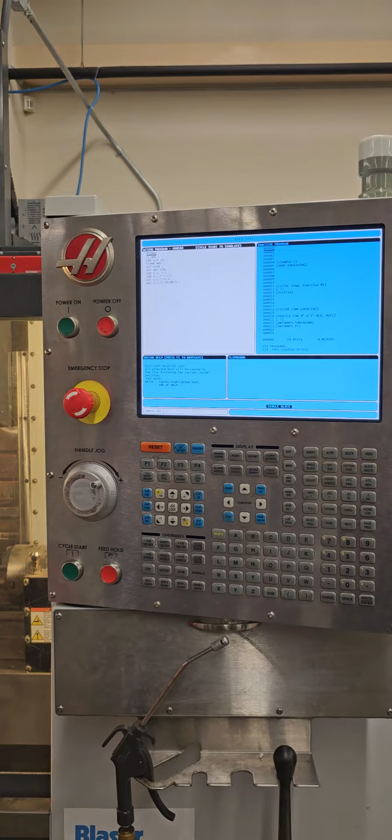Just as over there, whenever we have our test, you determine where you put your WCS, right? It's going to be in the center, bottom left, top right, whatever corner. You determine where you're going to put that at. You have that freedom, right?

So you have to touch off your X0, Y0, then your Z0 on whichever tools you're using, right? So if I'm doing facing and profiling, that's two tools I have to touch off, correct? You guys know how to do that? Because we went over it. That was the first test pretty much, right?

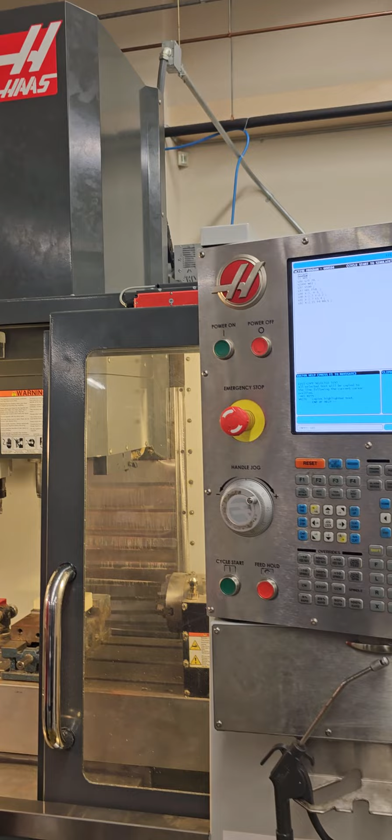So since your class starts right now, in 10 minutes, I'm not gonna go over that. I'm gonna go over what the program is, right?

So on this machine, it is a little bit different to call up your program. So I'm gonna go to list programs, come down, I'm gonna just call up 505, right? I need to push 00505. Somebody had a G01 before, so it's not gonna accept it.

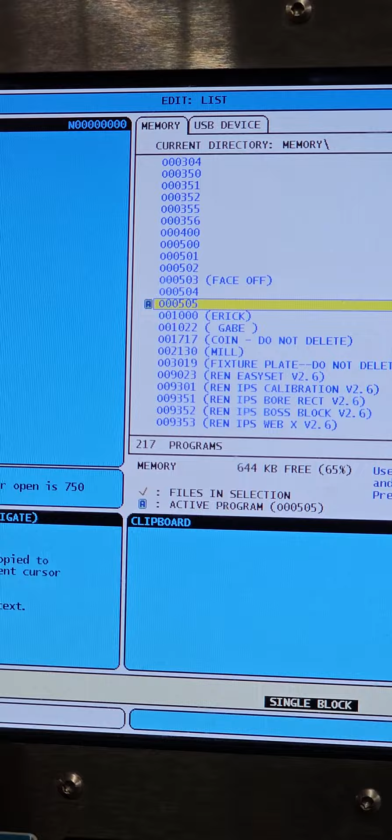Alright, so memory O00505, enter. See how I created my new program in there, right? So on this one, it automatically selects it and puts it under memory. Good. So all I have to do is hit edit, and there I am, right?

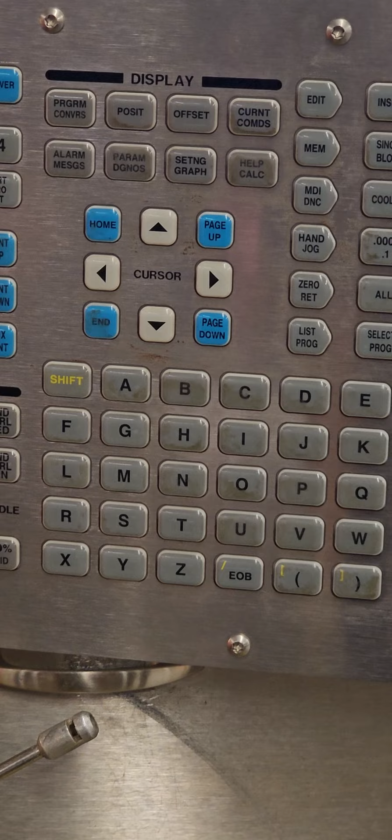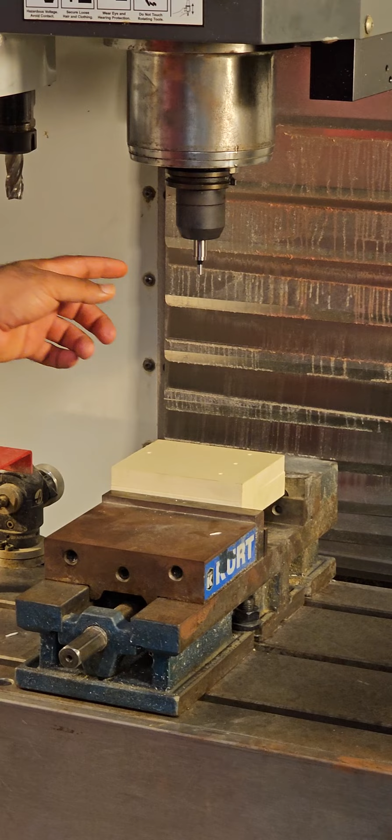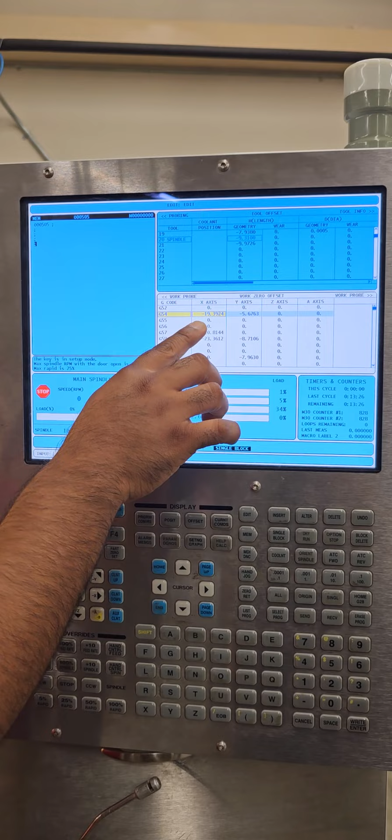Yeah, so in this case, it's 100 thousandths. So over here under offset G54, if I had my edge finder there, I would push part zero set.

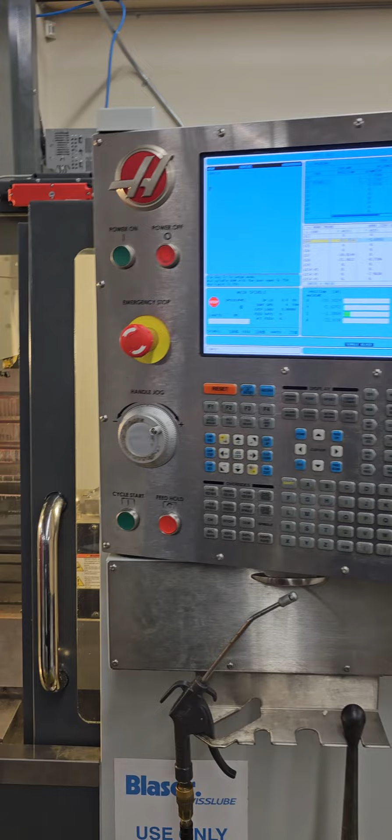After that, I would just hit 0.1 enter, and it will automatically add that 100 thousandths. And that's right, because that edge finder's a 0.2, so we're using half of it. Okay, yeah, somebody broke the half-inch one. Damn, that sucks.

So remember, guys, if you do it down here, that Y is going positive, so it's still positive 0.1, right? But if I do it in this corner, my X would be negative 0.1, and my Y would still be positive, right? So it has to be correct and it has to make sense.

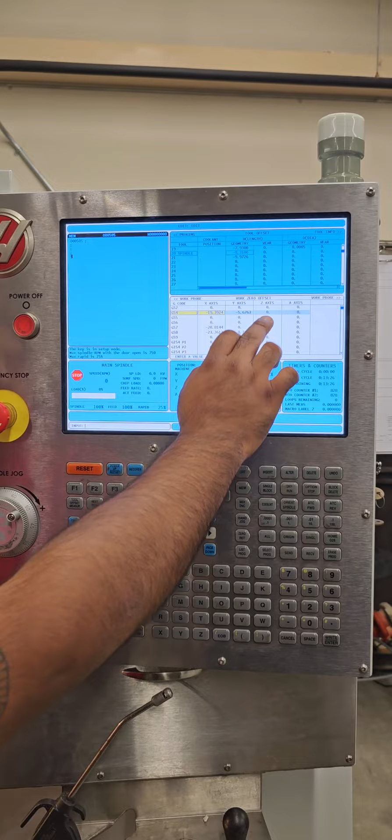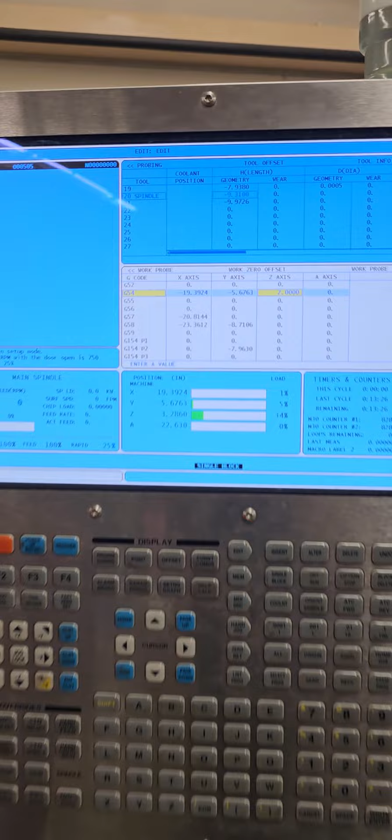All right, so another quick thing is you want to make sure you have Z0 under your G54. When I tell you guys to run it 2 inches above, after you touch off your tools on your Z, that's when you're gonna add the 2 inches here, enter, yes. Now everything is gonna follow suit 2 inches above the part.

Does that make sense? But if you have a 2 on there, and I touch off, like let's say tool number 1 or tool number 2, it's gonna offset those 2 inches from these numbers. And that's incorrect. Why? Because when I load up for my next job, I'm not gonna know that I had that 2 there, and I'm gonna jack something up. Does that make sense? Correct.

So we wanna have it at 0 first. Then once you run it 2 inches above the air, then you just take that back to 0 and you run. Does that make sense?

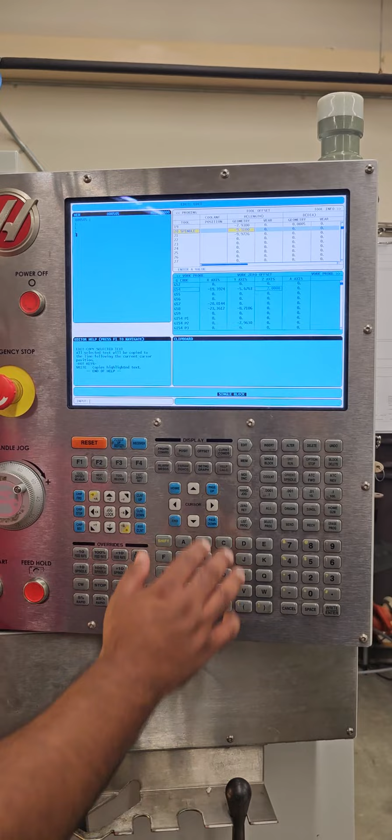All right, back to the program over here now. So what's the first thing that I need? I need to make sure my Z is clear, right? So G00, G53, Z0, end of block. That's it, right?

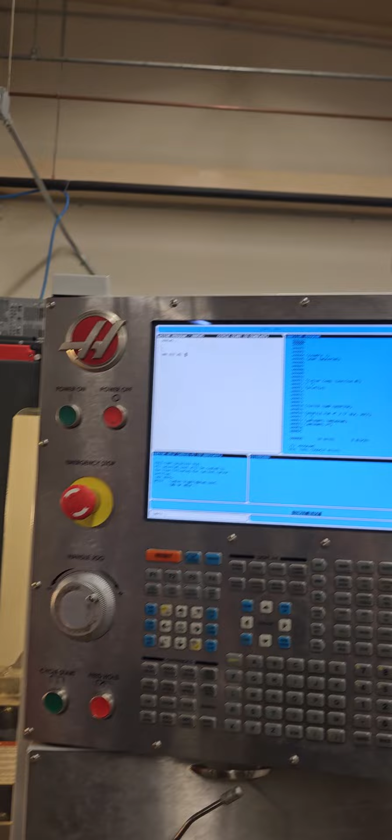For the beginning. After that, I need a what? Tool number, right? So let's just call for the facing. Let's do facing first. So T1 M06.

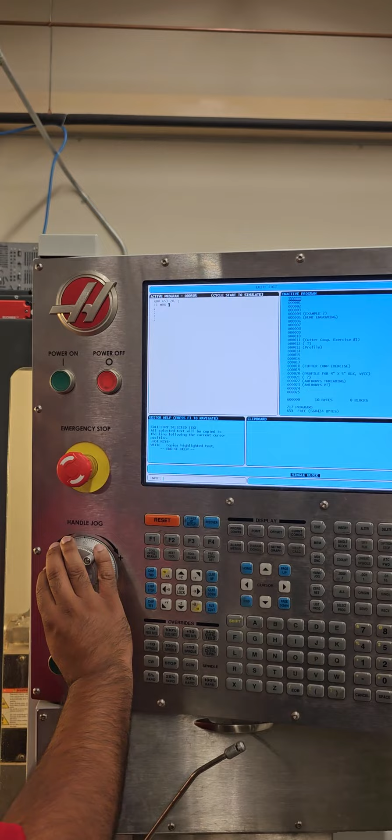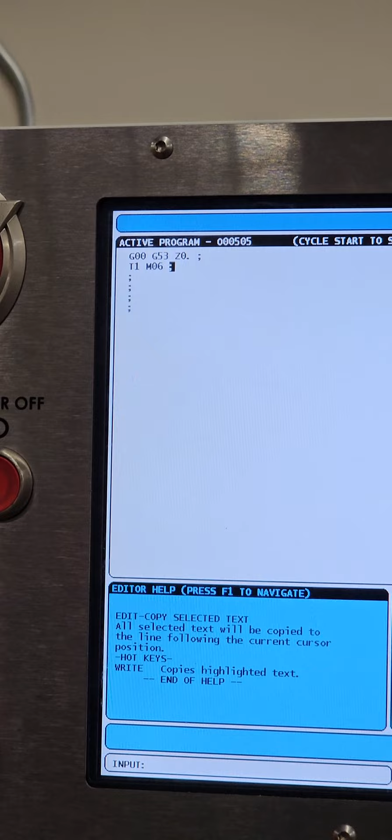Notice the differences, right? Between the lathe and the mill. The lathe, I would have had a T101, correct? If you put T101 on the mill, it's gonna ask for tool 101. Do they exist? Yeah, there's some of these mills that have closets in the back, right? But this one only has 20, so it's gonna give an alarm, correct?

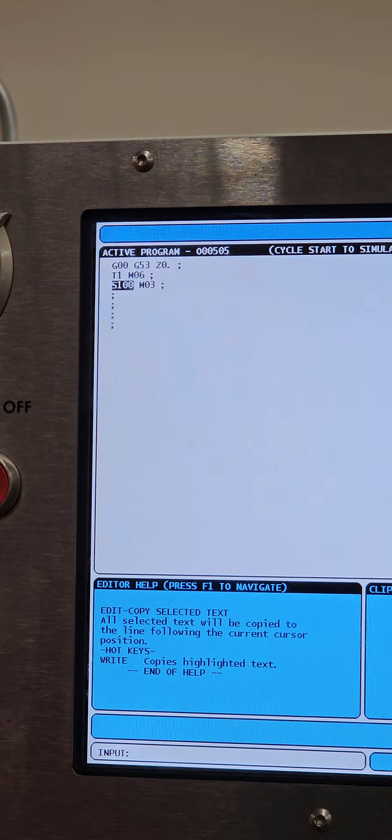As soon as I bring up my tool, I like turning on my spindle, that way I won't forget, right? So S1000, M03, end of block. Oh, I put S100. That's fine, I'm gonna go slow. All right, so what's next?

Work piece offset - I need to tell it where it's absolute or incremental, right? And I need to tell it where my G54 is at. While my Z is still up there, because I'm not in danger of anything, right? So I need a G90.

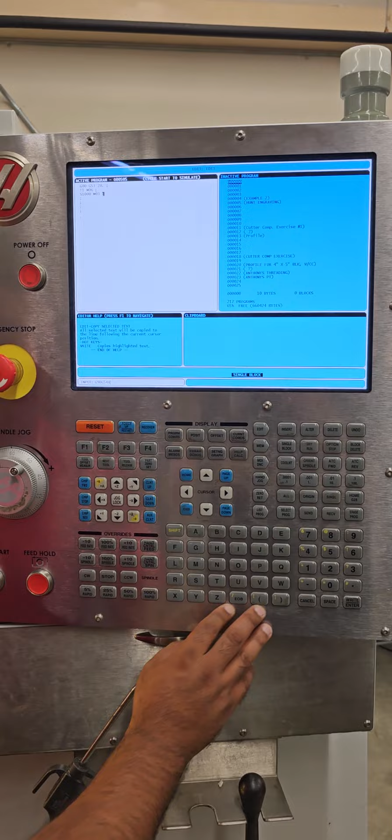G54, X, since I'm facing with my face mill. I know that this is 3 inches, so the radius of that is what? 1.5, correct? If this is my X0, I'm gonna start at least at X negative 1.6. Give it a good 100 thousandths on the left of it. So X negative 1.6. Does that make sense?

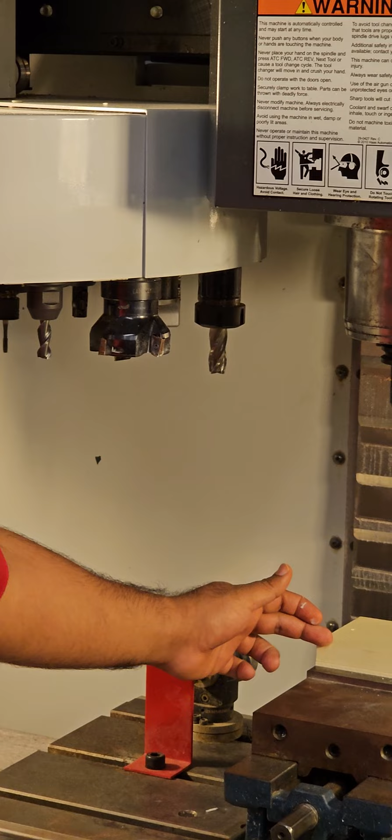On my Y, I know that this is 3 inches, and I set my center here. So I have 1.5 hanging down from here, correct? So if I call it Y positive 1.4, I still got 100 thousandths that the tool's gonna hang out and still clean up that material, right? So my Y could be 1.4.

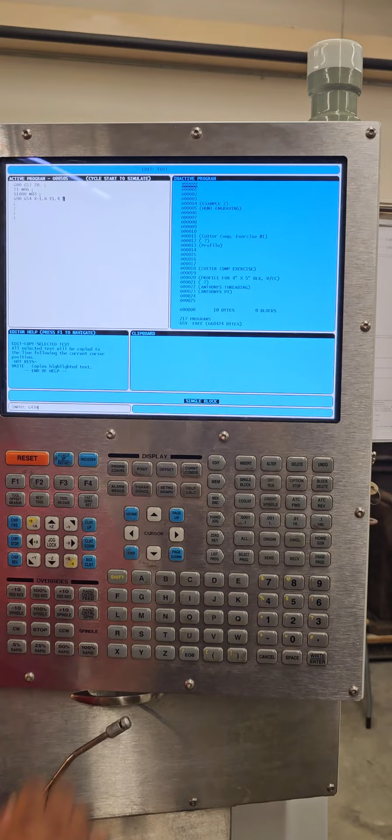Are we tracking so far? Yes. Alright, so now what I need to tell it is my tool length, correct? What G code is that? Some of y'all should know this. G43, right? G43 always plays with my tool length. Well, my H, right? And that H needs to match up with my tool number, correct? Then I'm gonna give it a G00.

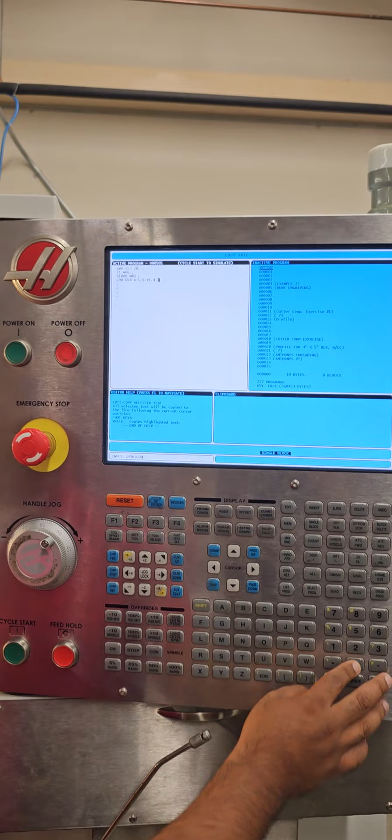Oh, I forgot a G00 up there too. G00 Z1 inch. So your H and your T right there on that line is matching. Yeah, so now it identifies the length of the tool, and we're gonna come 1 inch above the part, right? Really 3 inches because of the 2 inches that I'm gonna give it.

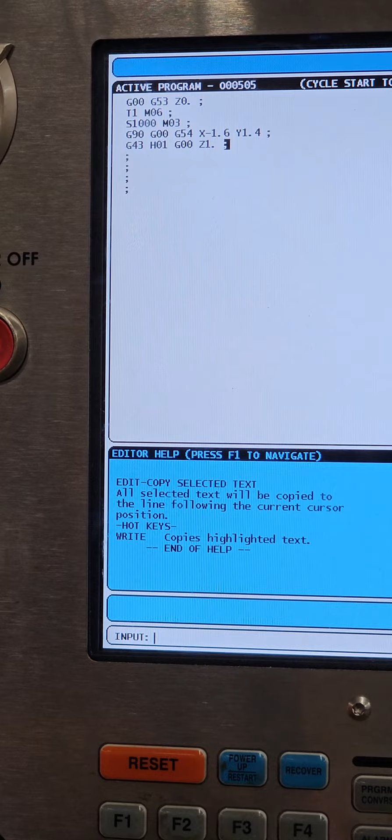All right, now is that tool height like the entire thing, or just from what's protruded out? From here to right here. That's 1 inch. No, that 1 inch that we put - right, we touched off from the face of the part, right? Yeah, that's it. I'm talking about the H, the H01 on top of it.

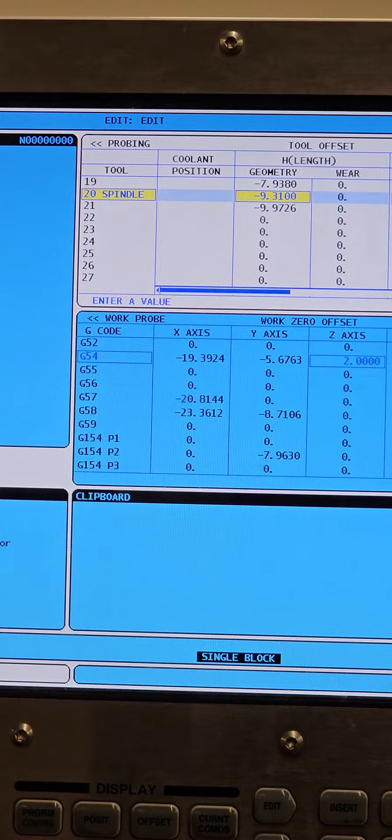Okay, so the H01 is just referring to the tool that's in there. The H1 is gonna be reading that. Whatever I set my tools at, that's what it's gonna be reading. Gotcha. From the machine coordinates, right?

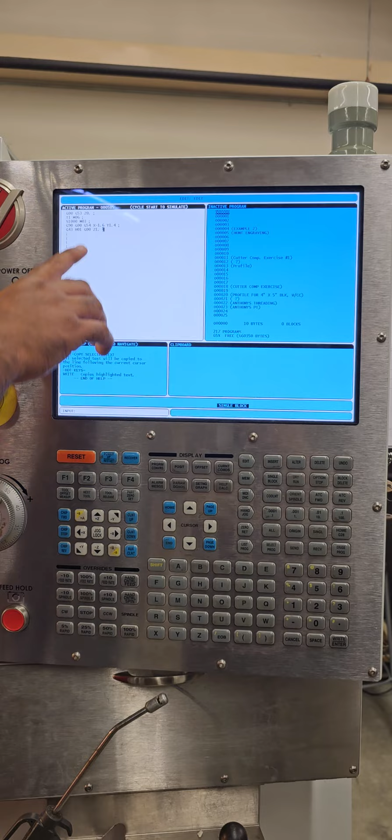All right, so now what do I need? G54 - I got a G54 already. Oh, I see, so now we're over here, right? 100 thousandths above - I mean, 1 inch above, right? So now I'm gonna take it down to the face of the part, right? So I can still be on a G00, Z0, correct? End of block, enter. So now I'm here on the face of the part, right?

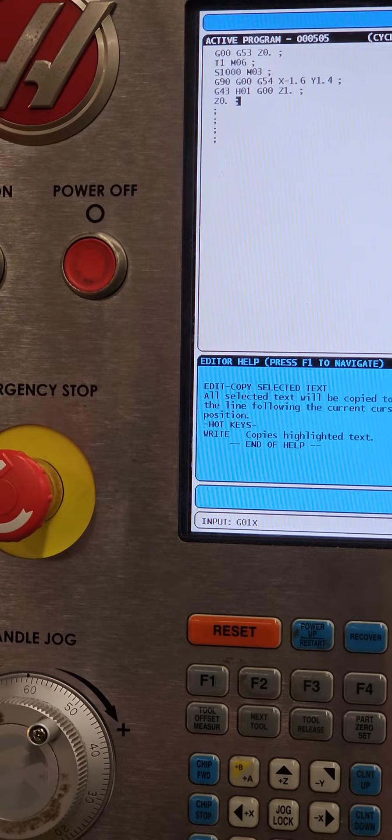After that, I'm gonna travel on my X-axis, but I'm gonna go to a cutting linear motion. So I need to change that to a G01. G01, correct? X, what's X gonna be? Well this is 0. This part is 5 inches plus 1.5 inches, 6.5. That's at least 6.5, but I want to go a little bit further, so I'm gonna go like 6.7 and I should be fine with that.

You already got an X in there. Oh - X 6.7. And what did a lot of you guys get an alarm on once your G01? What alarm did y'all get once y'all activated the G01? Some of you guys forgot to put a period, a feed rate, right? The G01, you gotta have a feed rate, correct?

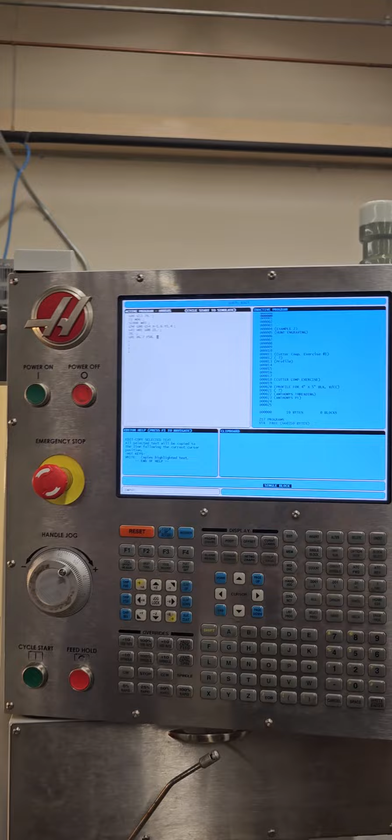So feed rate on this one, 50 is fine. 50 inches a minute. Is that what that is? 50 inches a minute, huh? Is that inches per minute, right? Yeah, this one's inches per minute, not revolution - that's lathe. Is the name. Gotcha, see, learning the differences now.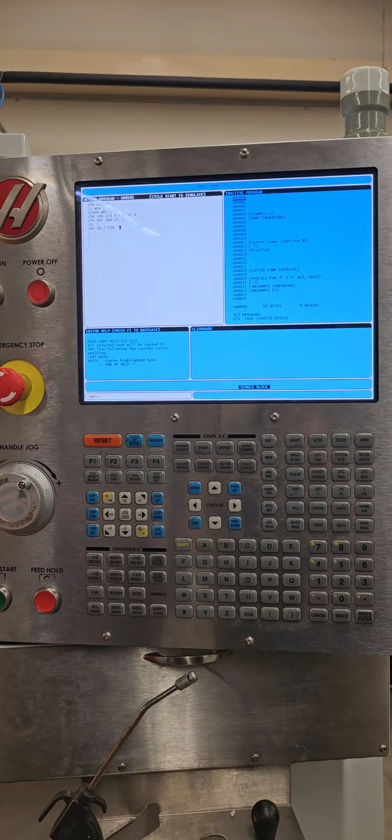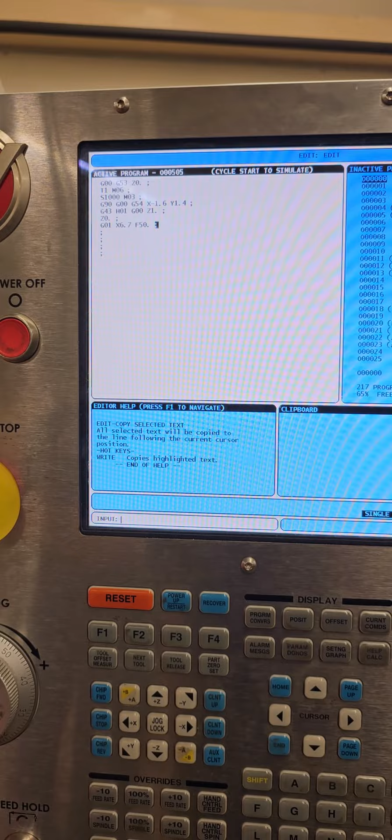So how I did it on mine is I put the feed rate up here with this. Would it still have worked like that? It would be the last feed rate, but that's the incorrect way to do it. So you got to put it behind G01, have it with the G01. Alright, so G01 and a feed rate got to go together, most of the time, and your coordinates in between.

Hey, it's already 12:30. That's fine. He's not even over there. The door's locked, we're good here. Yeah, go ahead and open it up if you want. Oh, you got the key, huh?

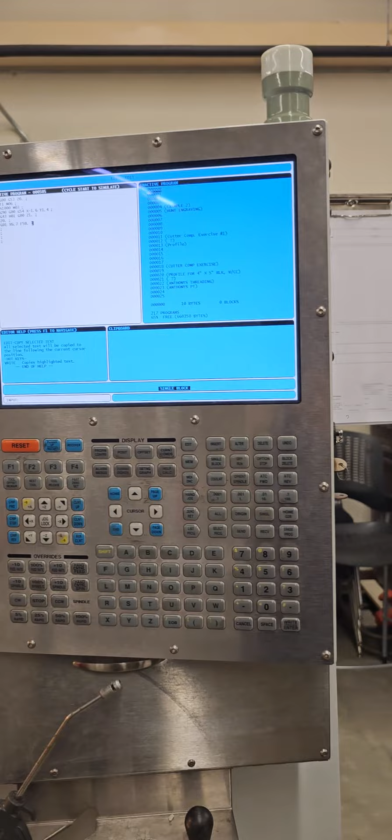Alright, so after that, we come over here, right? Then to make it go faster, we're gonna rapid on a Y, correct?

So we're gonna change our G01 to a what? G00, correct? G00 rapid. So if it's 3 inches, I was already at Y 1.4. So even if I go to Y 2.5, I'm still gonna have enough to clean up, right? So that is zero right there.

So I'm gonna G00 Y 2.5, correct? So I just went up here, rapiding it, right? So now I'm gonna wrap it back over here. I'm gonna linear cut back to this side now, right?

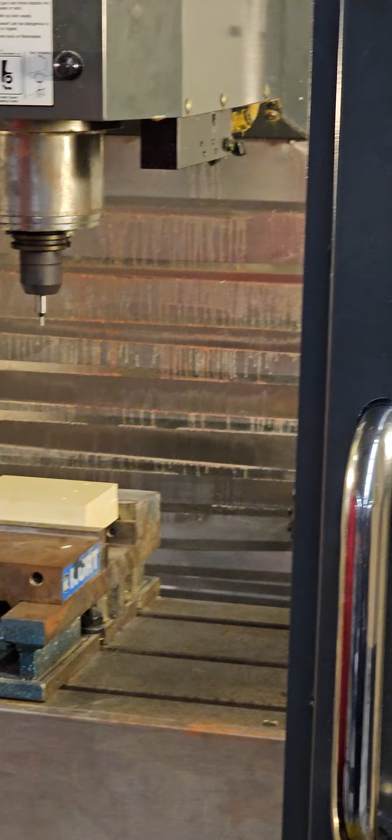G01. So it's gonna be a G01 X, and I'm just gonna put the X that I put up there, right? X negative 1.6, so it goes back to the same spot on the left side of the part. And since I've already established my feed, I don't need to put another feed on there, correct? Okay, so it goes to the last. You have to establish your feed first, though.

Okay, all right. So now after that, I could G00, rapid up my Z, right? It brings it 1 inch above the part. And then I could go ahead and G00, G53, Z0, end of block. And really, I don't need to bring my Y over here because I'm still going to be cutting on my part, right?

So usually you want that Y0 at the end of it. So, but we still need to have what on this? An end. Well, M05 will stop your spindle, but the M30 will also, or M00, or M01, right? But we will, since we have another operation, M01.

And this also has an option stop too, like that one. Yeah, they all have. Every machine has options.

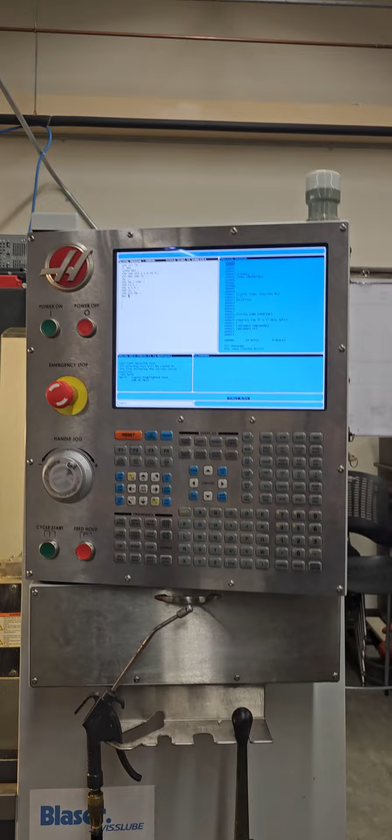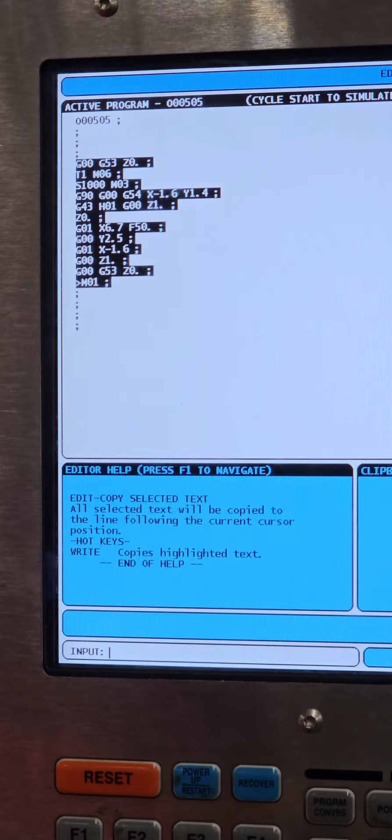Okay, all right, so after that, I would know that I need to start my actual profile, correct? So to make it easier on myself, I'm gonna just F2, come back down, F2, copy, enter, paste, bring it down, enter, undo, right? Now, don't take it as easy like when you're on the computer that, oh, I just copied it so I'm good. No, go through the whole thing again and change what you need to change, right? Because it's too easy to overlook something, right?

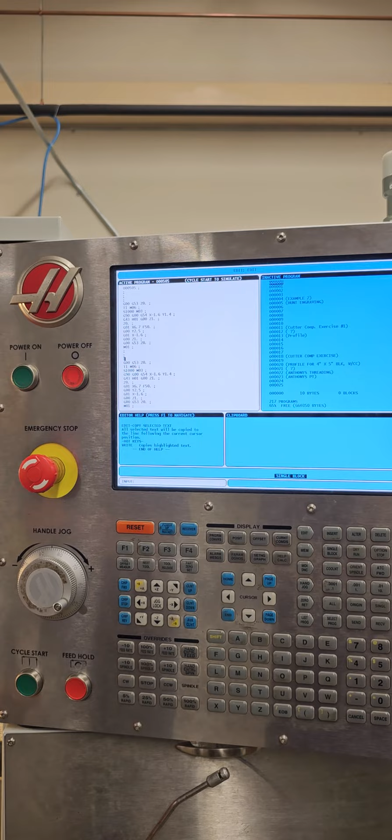Too easy to make simple mistakes on this, yes. Too easy to overlook a negative or a decimal point or whatever. Because there's a lot of dots in there.

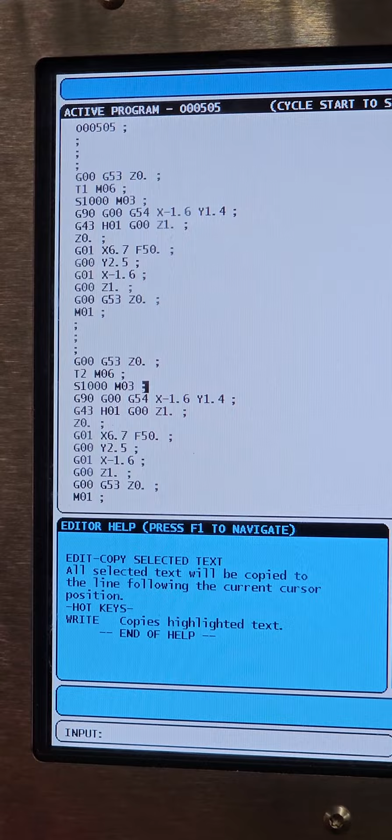So I'm gonna come over here. I'm gonna start at the beginning. Oh, I know that needs to be changed to a T2, correct? Yep, you're not edge finding anymore. Well, not facing anymore. Or facing H. Okay, yeah, the H, but okay, we'll go ahead and change the H since he has an H on this line. Two.

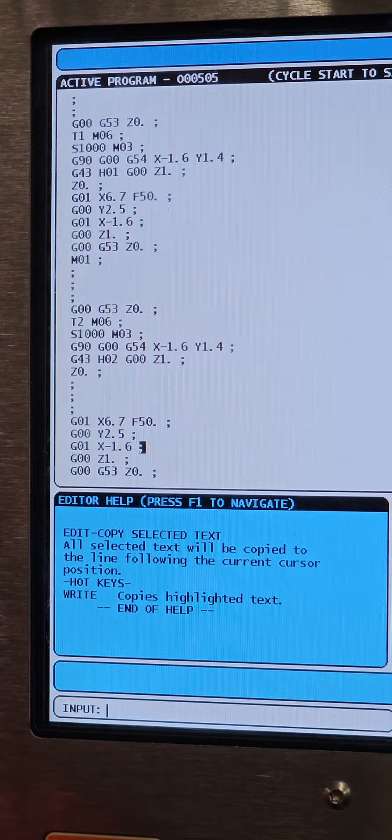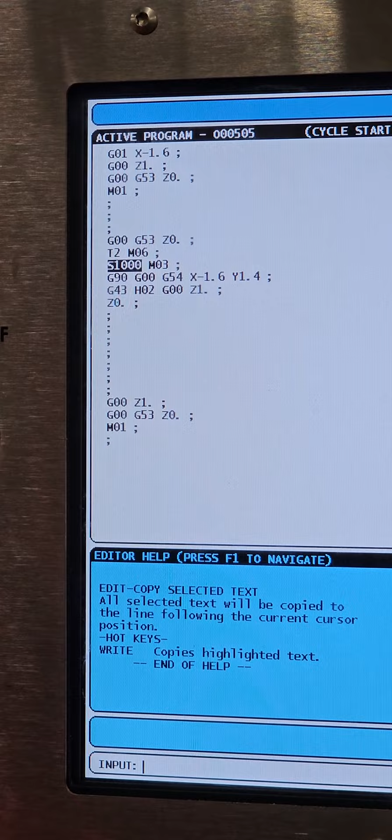So I know that pretty much from here it's gonna be different, right? And then here, so this is my body, right? So I'm just gonna delete that body, correct? So now that I know that I'm doing the profile, correct?

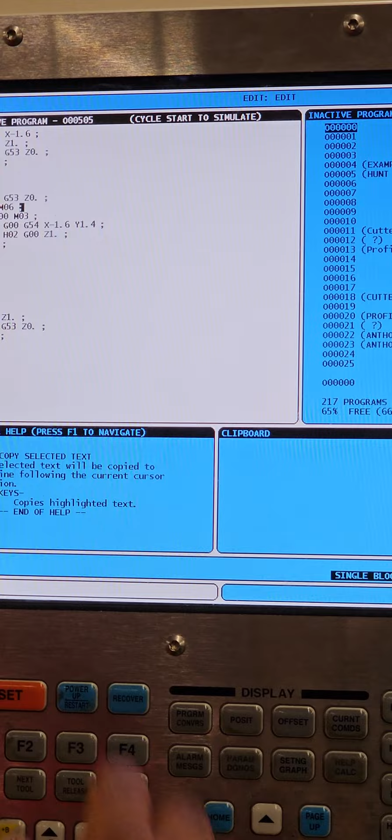Now I'm gonna think, what are the rules? Because I wanna make sure I use cutter comp to make my life easier, right? So I know that I gotta be off the part at least the radius of the tool, correct? So my first X movement up here is gonna be X negative 0.35 because it's 250 plus another 100 that I'm off, right? And that Y could be 0, guys. It's no big deal because I'm still off the part. Does that make sense?

So then I still have a G43, I still have an H, I have a G00, I have a Z stops at 1, then it goes to 0, and I mean that's fine, guys. As long as I'm not cutting the part yet, those numbers could be fluctuated, right?

But since I know that I'm gonna start cutting my part next, I want to drop my Z down because what's the rule of cutter comp? You want to activate it once, you don't want to activate it on Z, right? So I'm going to drop down my Z to 0.5, so Z minus 0.5.

Oh right, and that's cutting. Now I'm going to activate my cutter comp, correct? So it's gonna be a G41, G01, X0.0.

Can't forget my what? Because I just put your a feed. There you go, damn, I'm a good guesser. I guessed my way through college. So that's what I was getting confused on last night.

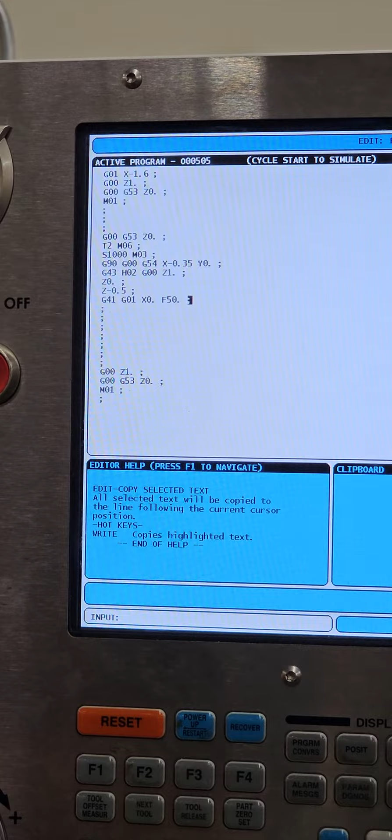That X, when you do G01, X0 for the cutter comp, what is that defining? Like actually, well no, I'm just on a clarification, just a reminder. Are you asking a question or you're telling me? Well no, I'm asking like, oh.

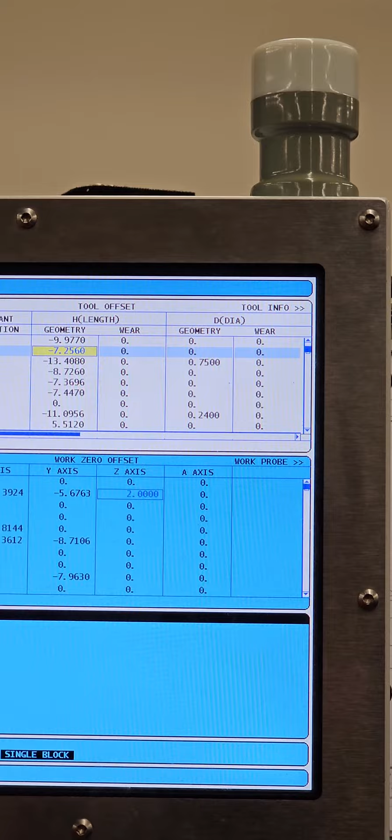Is that one right there? So diameter, that's the D value. So it knows which one to compensate for, right? And it knows how much because you put a value there, correct?

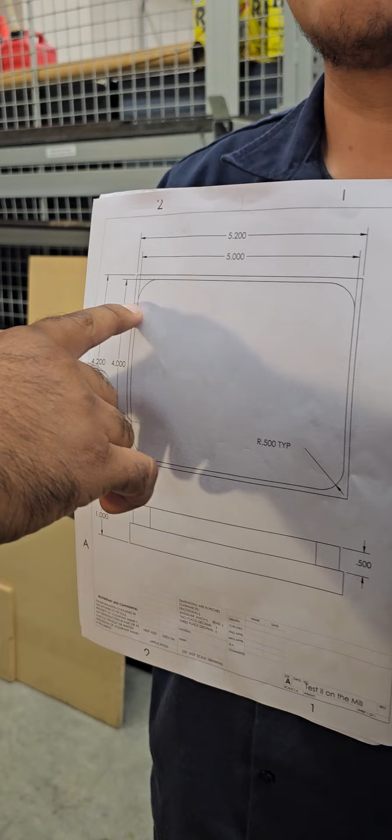So now from here, I'm down here. Right there, I'm down here now, right? So now I gotta come up on my Y. If it's 0.5 and that's just 4, 3.5. So Y, I'm showing a G01, right? So Y 3.5, and a block enter, correct?

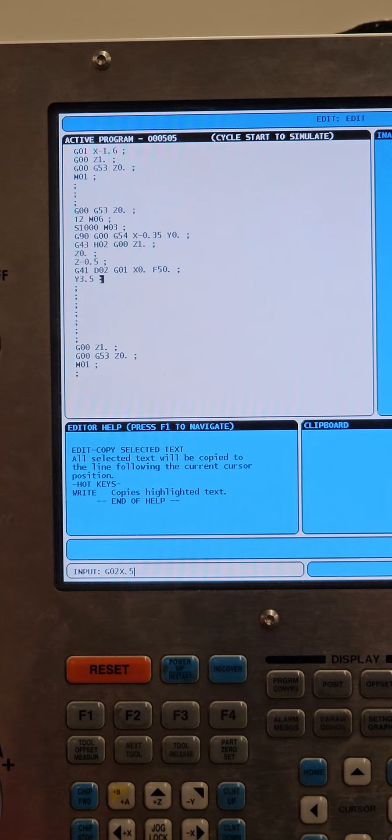Now I gotta make this radius. So is it a G02 or G03? G02, right? G02, X 0.5, Y that's 4 inches. And I can't forget my R, radius, correct? 0.5, 0.5, enter.

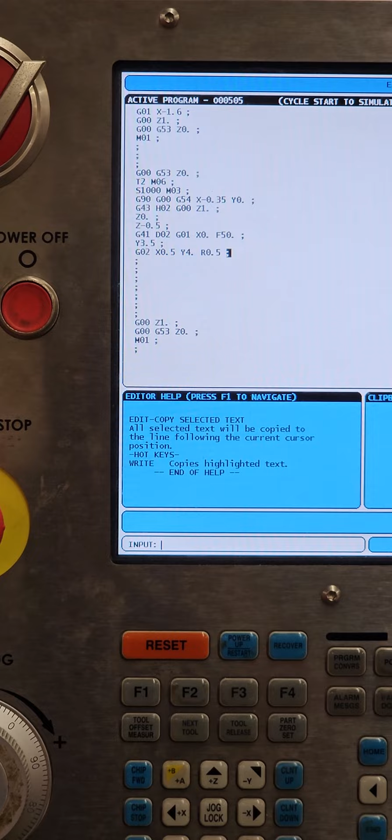Bam, see how easy that is guys? Yeah, that's the easy part. After that, I need to come down over on my X.

So that's 5 inches, stop half an inch before, so X 4.5. But I need to make sure I change it back to a G01, right? G01, X 4.5 end of block.

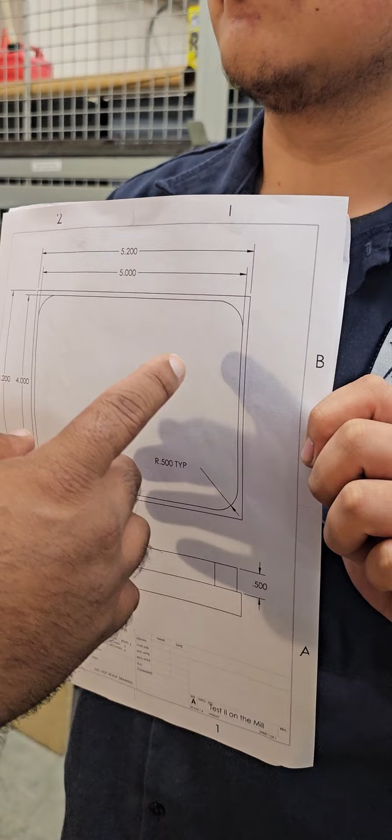There we go, right? After that, you got G02, another G02 clockwise, X 5 inches, Y 3.5, 0.5, R 0.5, end of block. There I go, right?

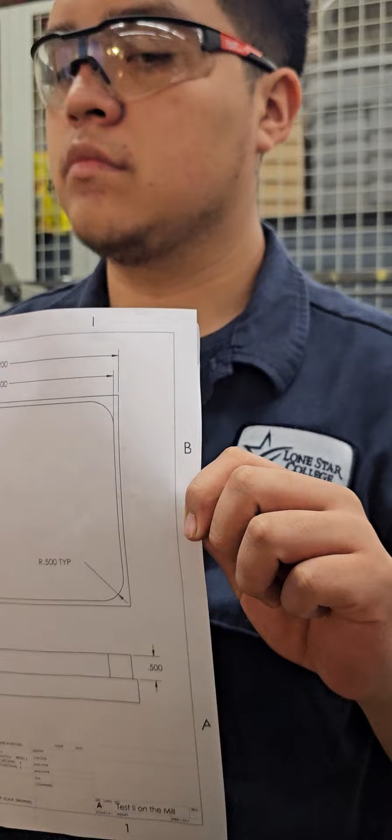After that, I'm going to change it to G01, Y 0.5, correct? End of block, enter. So now I'm going to make this radius over here, correct?

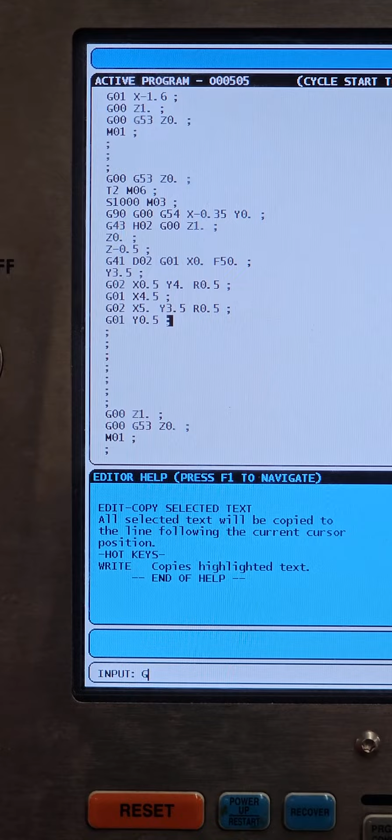It's still a G02. X 4.5, correct? Yep. Y 0. Radius 0.5. End of block, enter. Change it back to a G01.

We're going from X here 0.5 to there, right? End of block, enter. See how easy this is guys? This part, yeah.

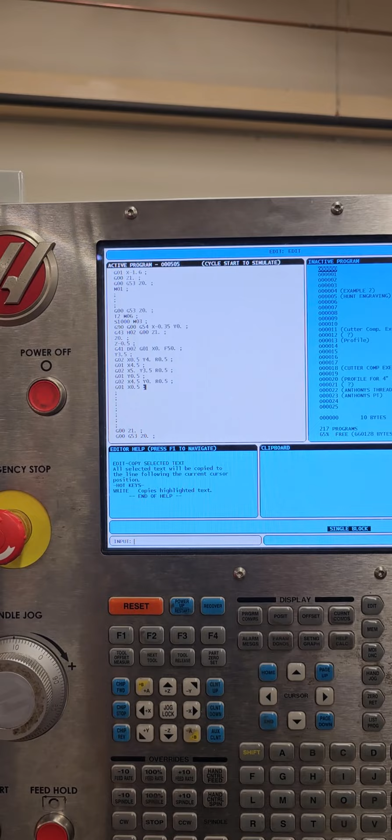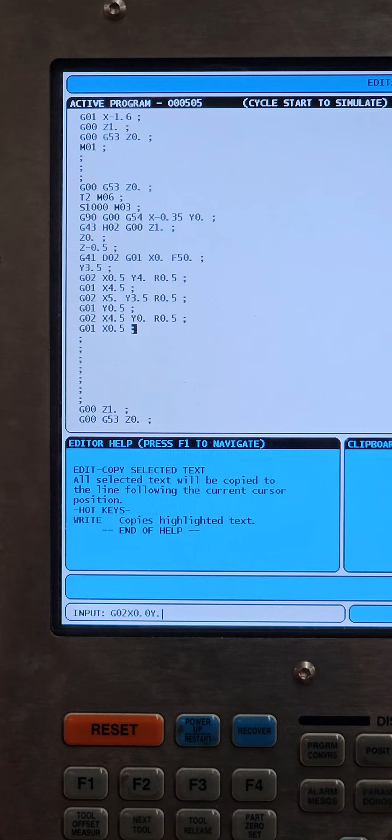Alright, after that I got one more radius, right? G02, X0, Y 0.5, R 0.5, end of block, enter.

Now this is what we can't forget because we use cutter comp, right? Now you gotta turn the comp off, G40.

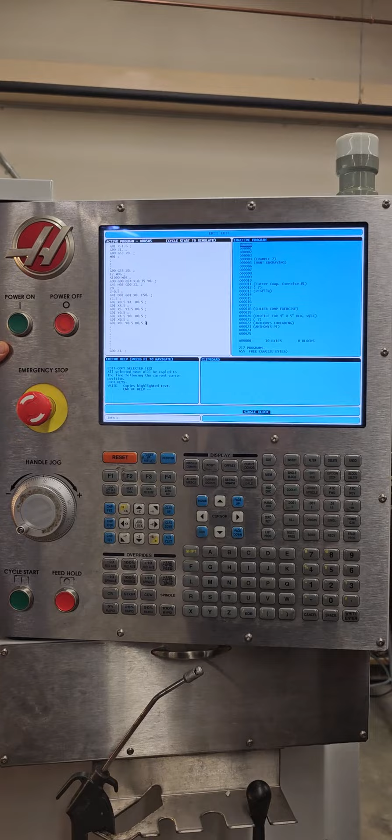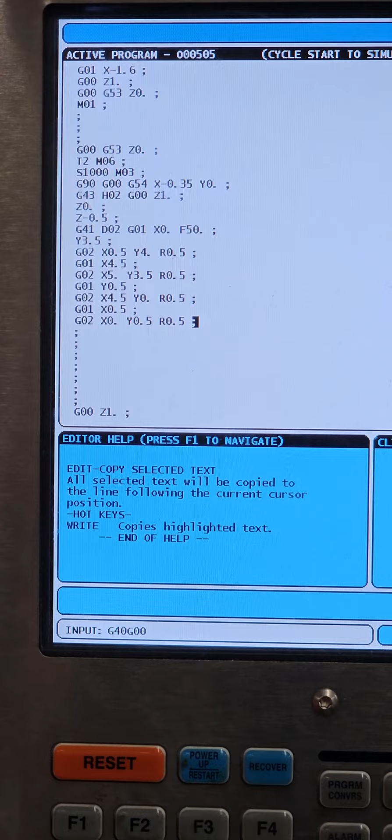G40. Since I'm gonna be off the part now, I could go to a G00 or I could keep it a G01, doesn't make a big difference. It's either gonna feed or rapid, right? And I could just put that same value, X value that I had on it, because it's gonna go off the part, right? So X minus 0.35 and the block, enter.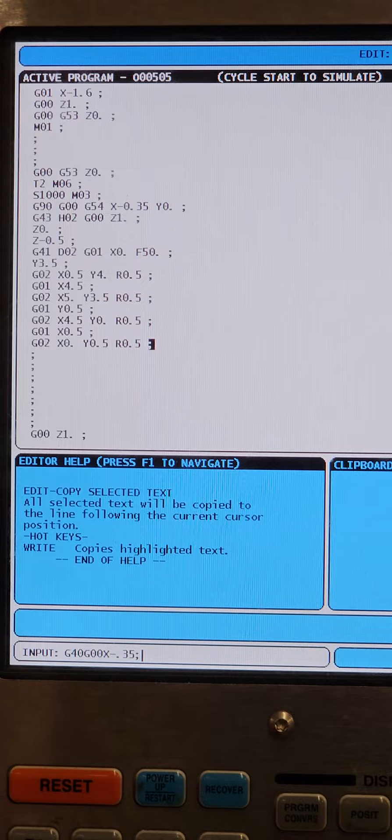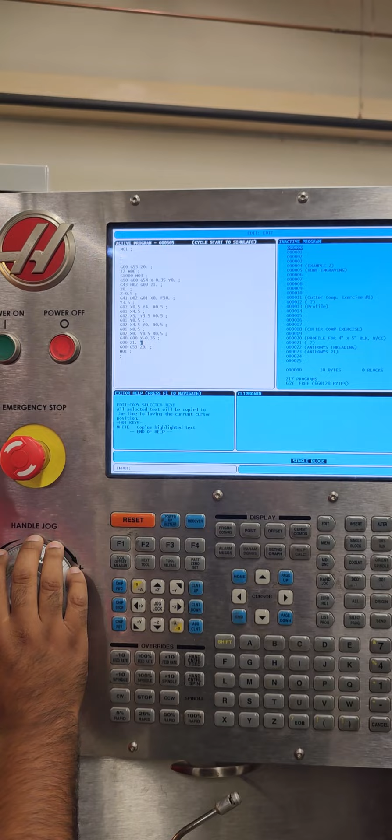That makes sense? Yes. So after that I still have my cancellation for my last one, right? And I am gonna go ahead and add a G00, G53, Y0 on this one, just so I don't reach for the part, right?

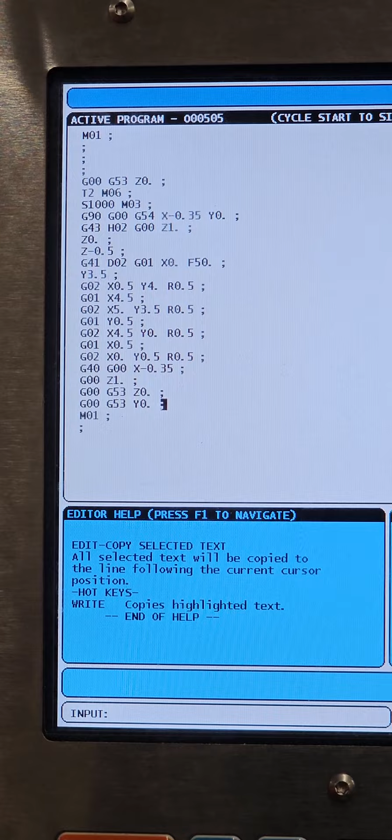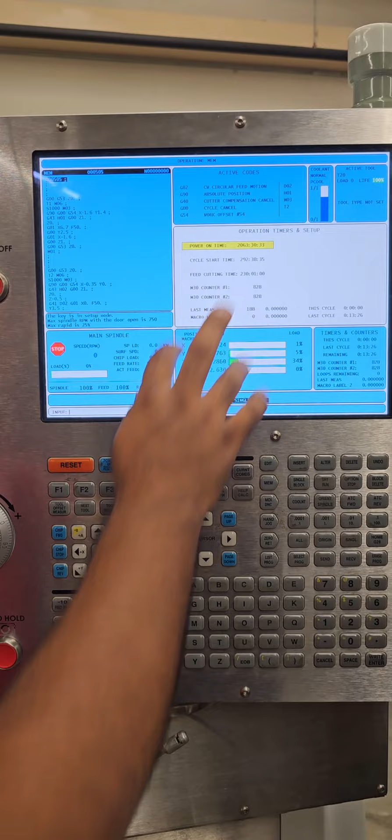Memory current commands, you wanna run it. Remember, when you just turn on the machine, it's like on this page, right? If you hit memory current commands, now you gotta hit page up to get to that page of distance to go, correct?

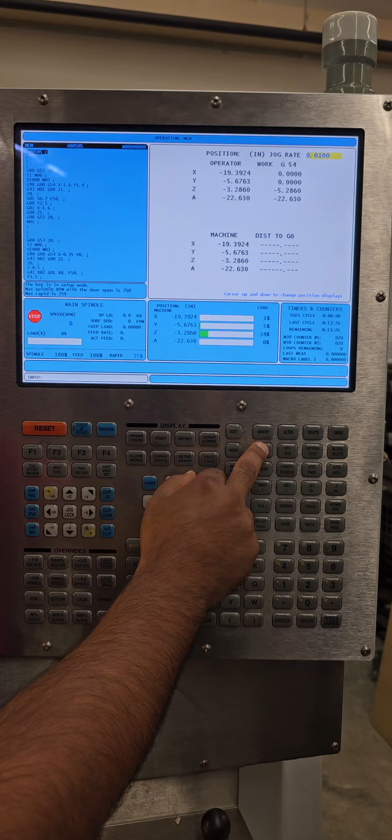So the correct way to run it, you're on distance to go, you have 5%, you're on single block. Remember, if you don't know if single block is on or not, look at the screen, correct? Single block is on, one thumb on the red, one thumb on the green, and you just hit it line by line, right?

When you actually run it, but let's see if we get any alarms at all. So I'm gonna take off single block.

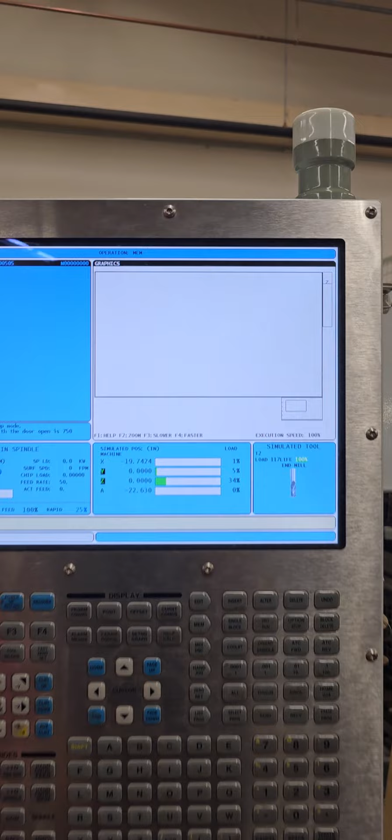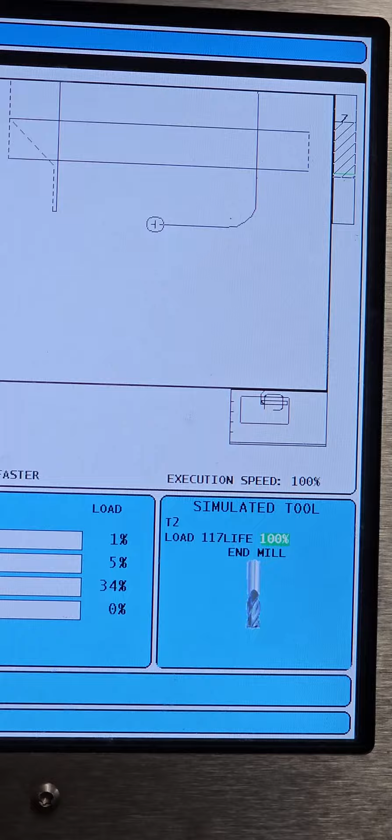Alright, so we saw how it was up there, right? So if I hit, remember it's still in the program right now, right? So if I hit F2, nothing's gonna happen. I need to hit reset to get out of the program, right? Now I hit F2, now I can look at my little window.

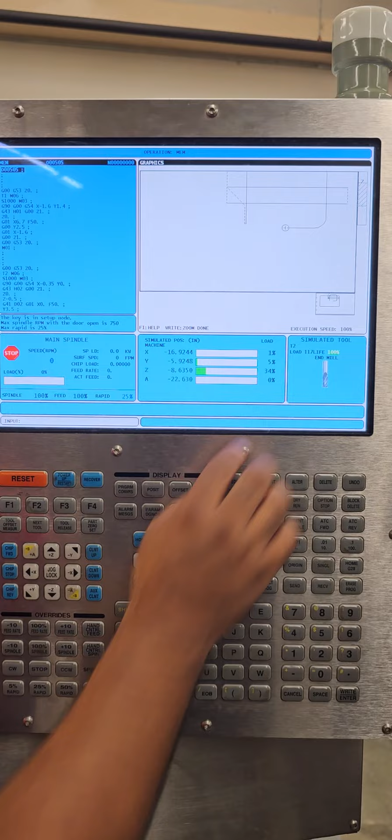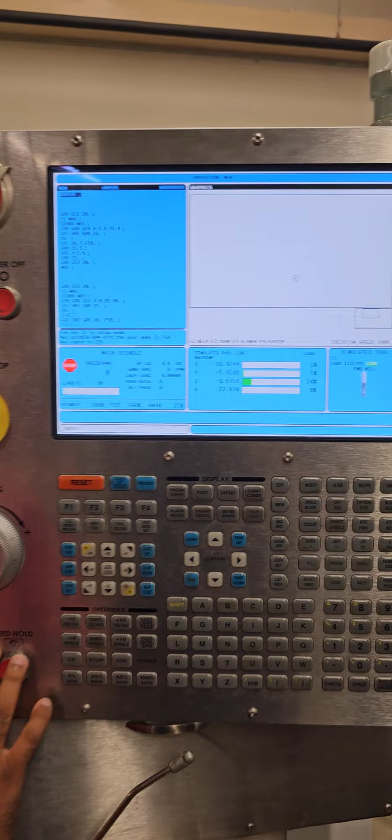I'm coming up, I'm coming over, then page down. I'll come up, hit enter, right? Now I'm gonna run my program. Facing, profiling, going back home.

I don't get paid enough. That's it.

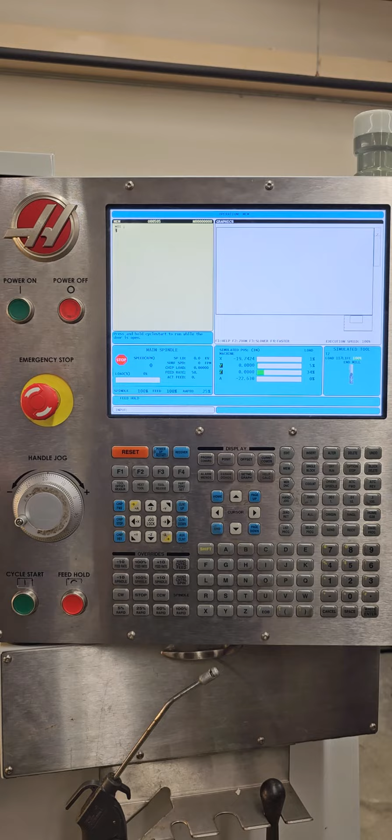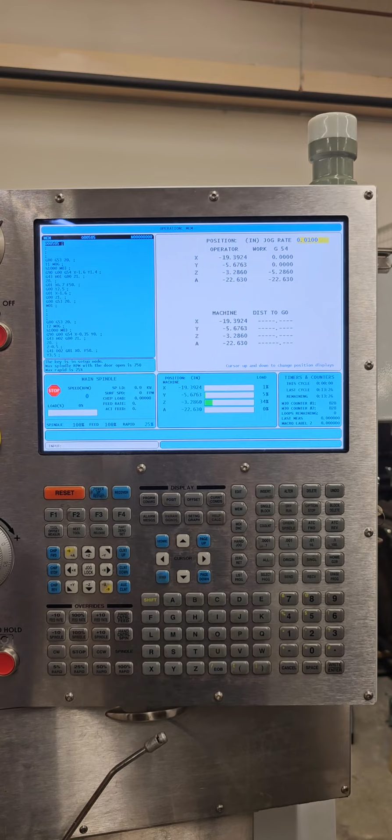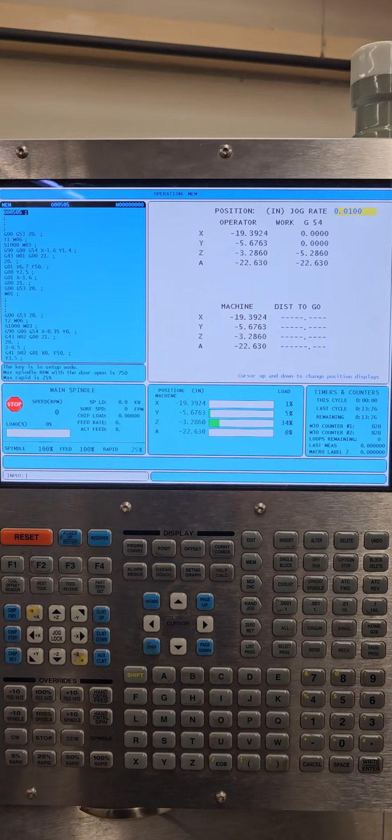That's it though guys, that's all you had to do. That was exactly 20 minutes, and with me explaining everything. But I didn't touch off my tools. So it's very doable guys, very doable.

Go to edit so you can scroll down.